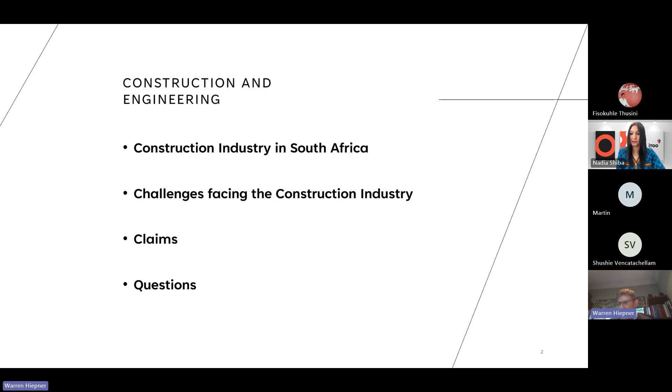Okay. So let's talk quickly about the construction industry and the economics of it. What I want to do here is put it into the South African economy so we can understand its role and who the players are. So in the ordinary course, South Africa's construction industry contributes about 3 to 4% of GDP. The South African GDP in 2024 was about 7.5 trillion rand. That comes out to quite a substantial amount if you think about it, the 3 to 4%. Important is that it's a stable figure. So year on year, it's always in the 3 to 4% of GDP range, which has two issues that arise from it.

The first one is that it shows you that the economy determines how the construction industry does. So the better the economy does, the better the industry does. But it also shows you that the industry is sometimes a leading light or an indicator of where the economy is and whether the economy is doing well or not. The GDP itself has grown about 0.6% from 2023 to 2024. It's anticipated to grow between 1 and 1.5% from 2024 to 2025 and about 1.8% to 2026. So it's supposed to be an upward trajectory, hopefully. A lot has to do with, of course, what's going on in America and tariffs and those sorts of things, but hopefully it's able to fulfill its promise.

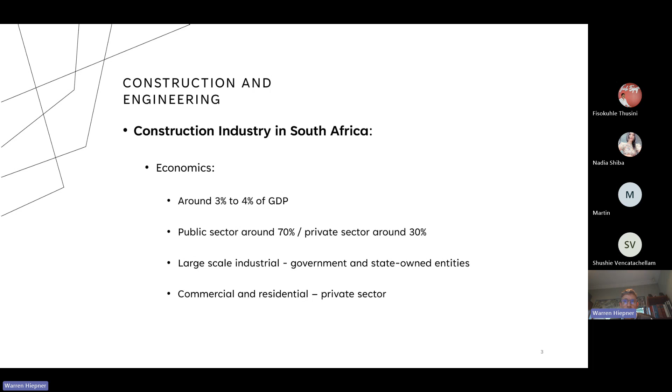There is a trend developing, particularly in renewable energy, where there are partnerships between the public and the private, so-called PPPs, public-private partnerships. And the intention there is to bring the best of both worlds together, with the financial backing and the infrastructural needs of the state combining with what has proven to be the ordinarily better efficiency of the private sector, so that together they can put something together that makes sense and is worthwhile.

Let's look at some of the details of it. So South Africa has about, I think our population is about 65 million, and of those about 15 million are formally employed. About 8% of those formally employed are employed in the construction industry. So you can see the industry punches above its weight as far as its contribution to GDP is concerned. It's only 4% contribution to GDP, but it does have an 8% employment factor. That works out to about 1.2 to 1.3 million South Africans employed in the construction industry.

The division of those demographically, about 70% are in the semi-skilled or unskilled. And of course, South Africa's majority of its employment workforce is in that demographic. So it is a major contributor to ensuring that those who are most looking for jobs are able to get jobs. As far as the professional side is concerned, about 15% of those employed are professionals. The majority of them are, of course, engineers, and the reason for that, obviously, is that there are multiple fields of engineering: civil, structural, mechanical, environmental, electrical, etc.

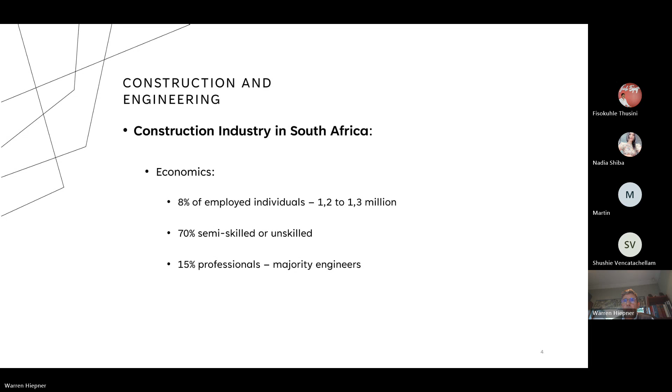Okay, let's go on. Let's look at the role players in a little bit more detail. So as I said, there is the public, the government side, and then there is the private sector. As far as the government or public state side is concerned, there has been a decline from 2018 to 2020 as far as government involvement in the construction industry is concerned. But a turnaround has come about since about 2021, and it's envisaged that that increase is going to continue into the future. Certainly, if you have regard to the promises made and the undertakings given and the indications given at the SONA address, which was given in February this year, I think.

There you would see President Ramaphosa spoke about 940 billion rand being set aside for infrastructure over the next 3 years. That's mostly in relation to roads, bridges, dams, ports, airports, and particularly power. Of that 940 billion, very promising. A little less promising is the reference to about 375 billion of that being allocated for expenditure by state-owned entities. And there we're talking about Eskom, Transnet, SAA Development Bank, SA Independent Development Trust.

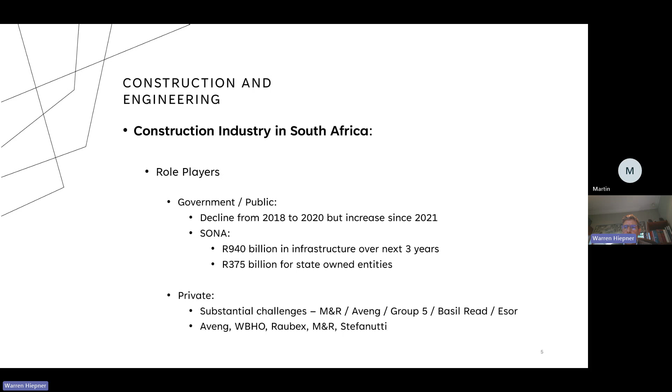And surprisingly, the bigger employers out of those are WBHO and Stefanutti. I think they have about 9,000 employees each of the total. Okay, so now we know who the players are, and you would see it's a substantial operation within the South African economy. And let's just look quickly at some of the challenges that they face and why they are where they are, and why they are not where they ought to be, I suppose, is the issue that we're looking at here.

And of course, the first one is all of our bugbear, load shedding. Introduced in 2008 and has never really gone away since then. There's been fluctuations up and down. There's been promises. There's been government ministers. There's been all kinds of things. Doesn't seem to go away. Those who followed the news this morning would have seen there is talk about them spending billions of rands. I think it's about R1 billion every 10 days on diesel expenditure to keep the lights on. And of course, that's not sustainable on a long-term basis.

So the challenge that arises from load shedding is it affects the time to complete projects. There's delays, not only in relation to the projects themselves, but also the projects in the pipeline, and there's a knock-on effect on those pipeline projects. The cost implication, well, time is money, so any delay, somebody's got to pay for that. And there are then efforts by the entities involved to protect themselves and take mitigational steps to avoid the consequences of the load shedding, which in itself is a cost implication for the project, and somebody has to bear that cost as well.

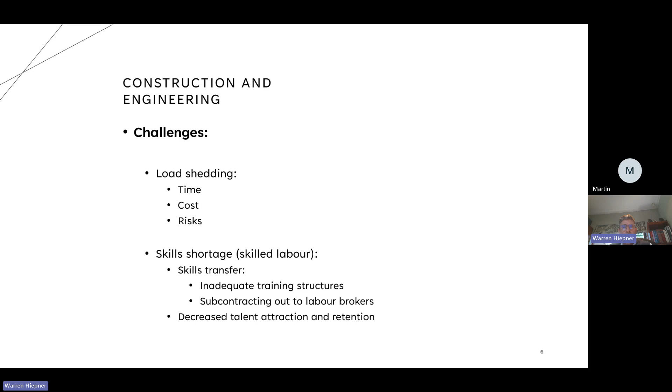The consequence of that is now we have quite a lot of foreign nationals being employed to fill the gap. And Martin perhaps will talk about one of the issues that arises from that, but certainly in the George collapse, there was a substantial number of foreign nationals employed, and a number of those foreign nationals were unfortunately killed in that collapse. And I don't think all of them have been identified to date because of that issue. So it comes with its own challenges and difficulties filling that gap with foreign nationals.

Of course, no presentation on challenges would be proper without a reference to corruption. South Africa is ranked, I think, 82nd on the Corruption Perceptions Index. I think they've got about 180 countries that they monitor. We're 82nd, and surprisingly, since 2021, we're dropping. And when I say dropping, meaning we're worse off. We are looking more and more corrupt. Corruption is prevalent in South Africa at all stages of the process.

One need just look at the 2010 FIFA World Cup bids and construction bids as evidence of these things going on. And it ranges from tender rigging, fronting, kickbacks, undisclosed conflicts of interest. Most recently, I think more than 10% of Eskom's staff was shown to have conflicts of interest that were undisclosed. Yesterday, I think there was news in relation to the Independent Development Trust of some 33 million rand being paid to family members from the trust that was destined for better intents. So it's a pervasive problem, and it's something that the country really needs to get hold of.

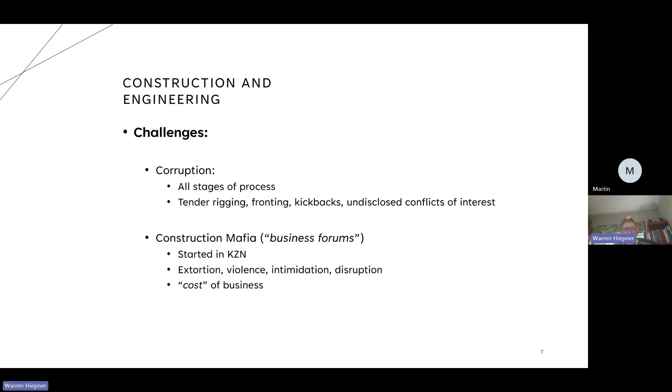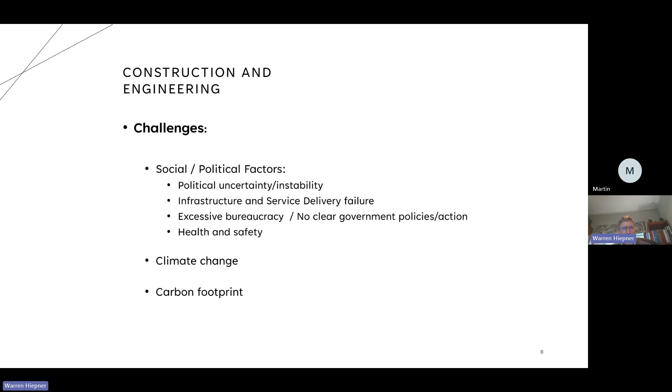Another consequence of that is the issue of repair methodology, and Martin may talk about Kusile, where the repair methodology of one of the failings there had air pollution implications, and the steps that had to be taken to get that through became a little bit more complex than what it otherwise would have been.

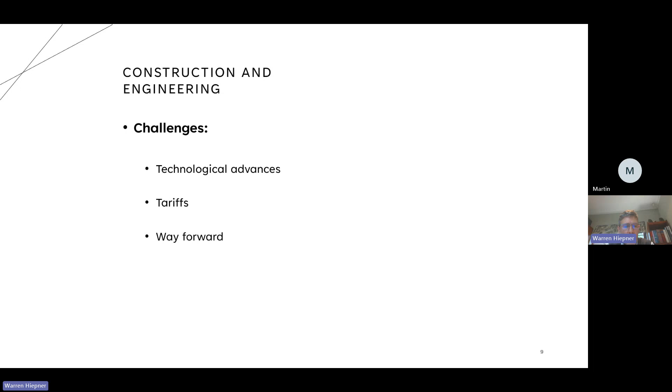So that's basically the background to what I wanted to give, and I'll perhaps hand over to you now, Shushi. Thanks, Warren.

Thank you for that. Just one question on retention. With all these challenges, it's possible in the next few years that we could have an exodus of engineers leaving our shores to other countries. Wouldn't that also become a problem for us as well?

Yeah. Or are you actually seeing it? Are you seeing it now that there is emigration?

No, I think we do see it, and what we see is the mature engineers, the ones we call the greybeards, were kind of put out to pasture to make place. Then what you had is the young up and coming engineers, and they have the ability to move, they have mobility, so they're in demand. So instead of them coming to fill the gap, they're looking elsewhere, particularly when South African prospects are not great. The result is you then have the newbies who are now having to shoulder all the responsibilities, sometimes way beyond their capacity and experience, beyond what they should be expected to be doing. So it comes with risk, there's no doubt about it. There is certainly something to be said for having grey-bearded people, and I don't say that because I'm grey-bearded, but there is value in having them around, just to give you some sense of reality and keep everything solidly on the ground. I think it's a problem for us.

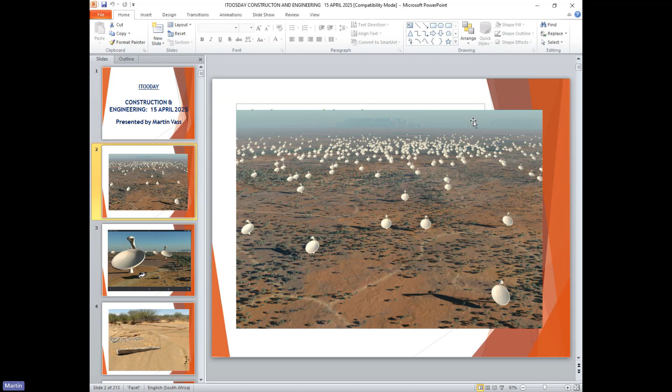Involved in this is about 450 kilometers of road. You see some of those in front of you. These roads are used for servicing these dishes, and also used by the heavy vehicles and cranes in erecting these large dishes.

At the time of the event, which was a couple of weeks ago - one reason they chose the Karoo is because you don't get much rain there. And of course, with the changes we're having with the environment and climate, we had severe storms up there, very, very severe storms, and what it's done is really taken away these roads.

Of the 450 kilometers of road on the site, about half were existing roads from the farms, and the other half were erected as part of the project.

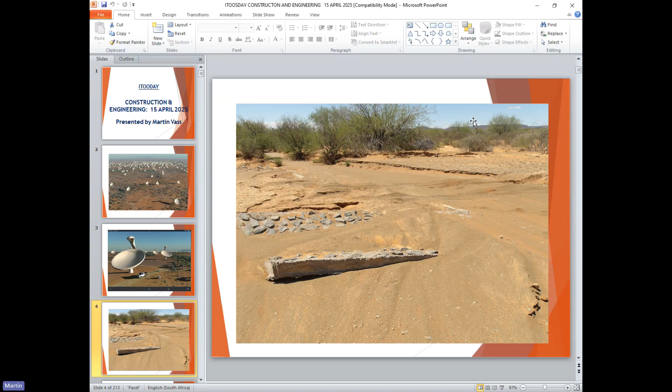Now, those roads have been absolutely devastated, as you see here. What you see in front of you is what we call a drift, a concrete drift, that allows you to drive through a small stream, and those have been completely destroyed.

I'll go to the next one, and you see here it's taken out the whole of the drains, the side drains have disappeared. Most of the gravel on the surface has been washed away. So really they've got to go back now, and we're in heavy discussions with the contractors and the owners of this square kilometre array about what we're going to do with these roads now.

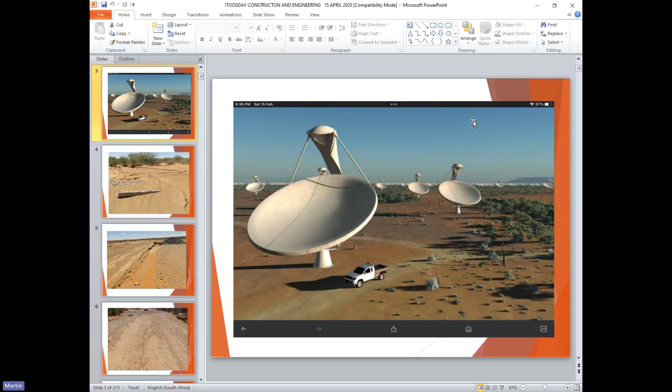So climate change is very, very much involved here. One of the reasons this site was chosen was because of the dryness, and now that kind of myth has disappeared. We're not sure now how they're going to rebuild these roads and to what kind of standard.

It'll increase the project cost considerably if we're going to put in what we call a normal road, which is a layered road with premix, or are we just going to go back and put in a standard gravel road, which you see in front of you here.

So when the engineers do a design, we have what we call a 1 in, so you have a 1 in 20 or 1 in 30. What that means is you look at the statistics and data for the last 30 years, and you say in the last 30 years you experienced a flood of that proportion every 30 years. And if you're designing 1 in 50, same thing - you look at the data for 50 years and design for the worst case scenario within that period.

Of course, what we're getting now is a return every 2 or 3 years of a so-called 1 in 30 or 1 in 40 or 1 in 50 event. But that will only feed through into design over a couple of years, because you've got to build up the data. So going forward, designs will have to change to allow for the change in climate conditions, but they're not being changed at this stage. We're still designing for a 1 in 30 or 1 in 40 design, but unfortunately we're getting those every couple of years, as you see here.

So the engineers have got to really think again about how we're going to design even temporary or permanent roads, and what data do we now use. Do we say we're in fact getting a 1 in 30 every 3 years? Because that changes not only the design, but the way it's priced and specified. So it's a major concern, climate change, and I'll show you the next couple of slides on other projects where we're experiencing this problem.

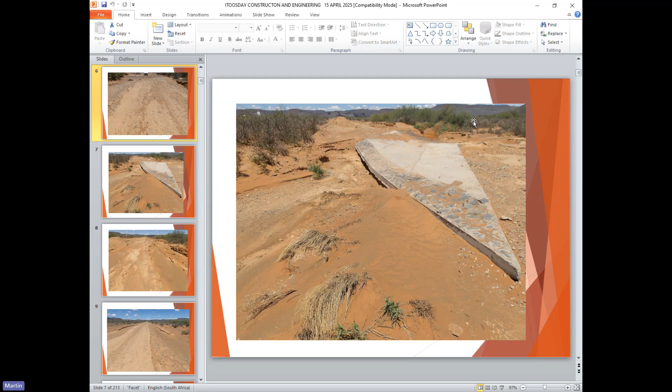It's also a problem with insurers. They insured a gravel road here, but didn't insure for the ground around the gravel road, which is now being lost. So the insurers may well say we'll pay you for the damage to the road, we'll pay for that, but we're not paying you to put back material that's been washed away, which was never part of the works. We have presented this to insurers and we're waiting for answers on that very question.

So this is a very large cost implication to the client, because the client has to now go back and put back existing ground before the road itself can be reconstructed. So it has a very great knock-on effect, not only on the cost of doing the job, but on the client itself, which we're experiencing in this particular instance.

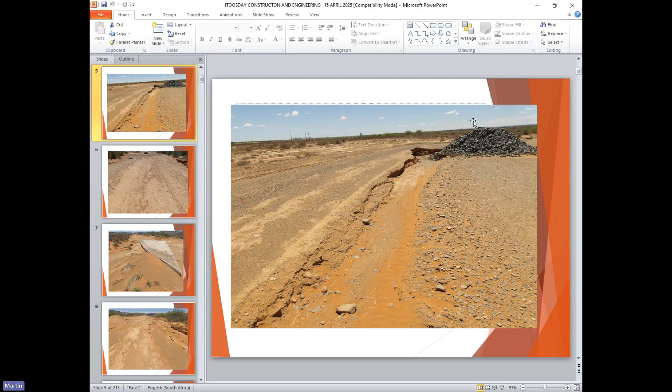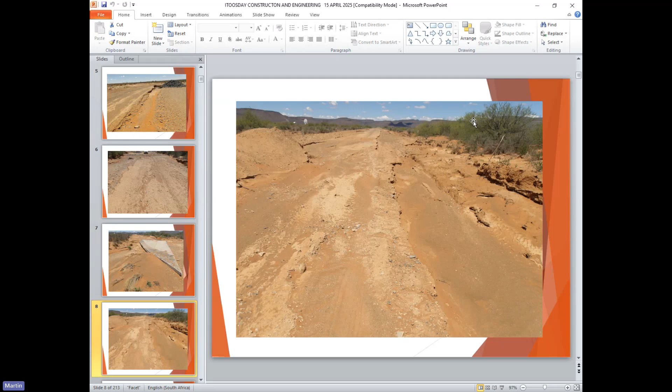Here you see the road has virtually disappeared. There is no road left. So here we've got to go back, got to re-establish that existing ground, and then rebuild the road from scratch. The road's gone.

Here, we've got a little strip of gravel in the middle. The sides, what were side drains at the time, to carry normal water, those side drains have disappeared, and all the ground around those roads has also been washed away. So we've got to come back in. We've really got to rebuild the existing ground.

And that was never the intention. And the insurers are going to say, well, we'll pay again for the damage to the road itself. We're not paying for putting back that virgin ground that was being lost. But again, we're waiting for that answer on that one.

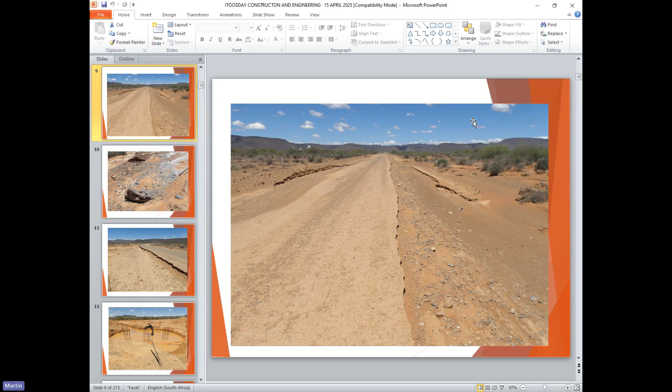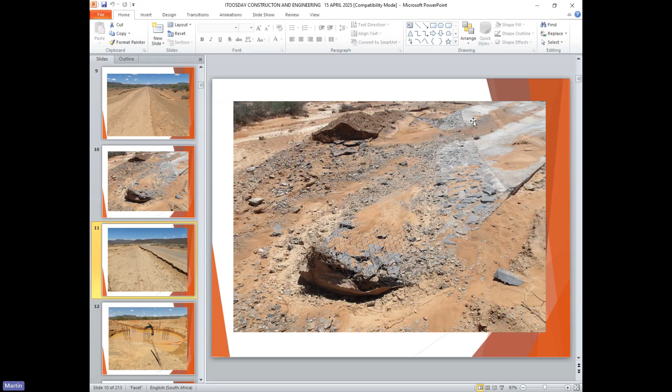This is another drift. As you see, it's completely washed away. The whole thing had to be demolished and start from scratch to rebuild the road and rebuild the drift. Very bad here. This is, in fact, one of the worst areas here. The road is now sitting elevated above the existing ground.

It's almost a point. Do you take the road away and drop it back now down to the new ground level, or do you build the ground level back up to that road? Again, there's a problem. If you rebuild the ground, even though you compact it, it's compacted fill. So when you have another heavy storm, you'll go back to where you are here. It'll just wash it away again. So there's a lot of consideration here the engineers have to make of how to rebuild these roads. And there'll be a lot of discussion on this point.

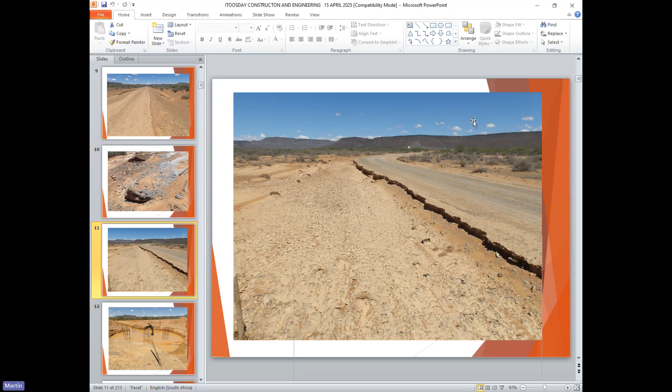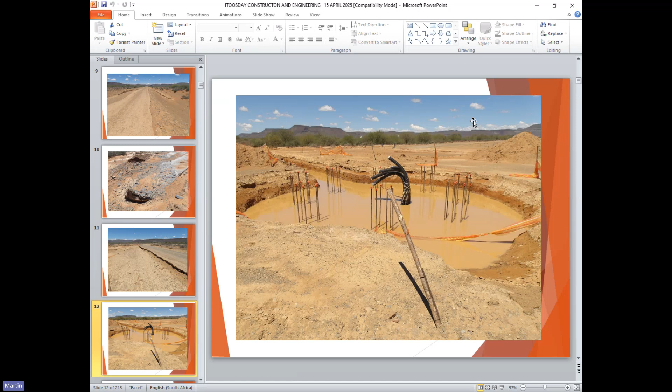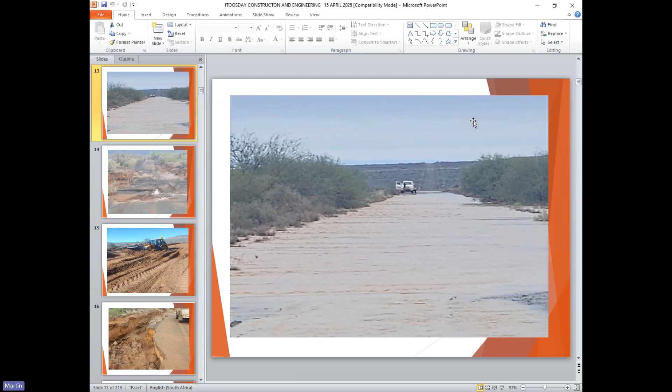The road here completely flooded. It's a very flat area, even though you can see a hill in the far distance. It's a very flat area. So when it rains heavily, there's huge ponding that takes place on these roads. And there can be days or even weeks before the contractor can get back onto the site.

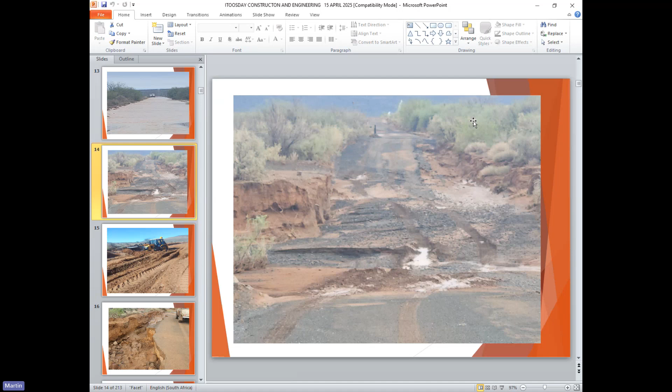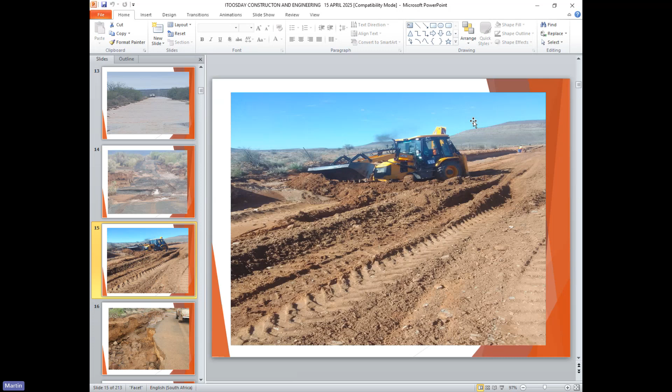They've started the reconstruction work here, and here they're putting the ground back that's been washed away before they start rebuilding the road. So they're bringing material in from borrow pits, and they'll slowly rebuild that ground area, and then they'll start really reconstructing the road. What they've done here is they've taken the road itself away as well, and they're rebuilding the whole area again. So they're not going to try to build each side of the road. They've taken that road away, and they're going to just rebuild it from scratch and just drop the level of the road.

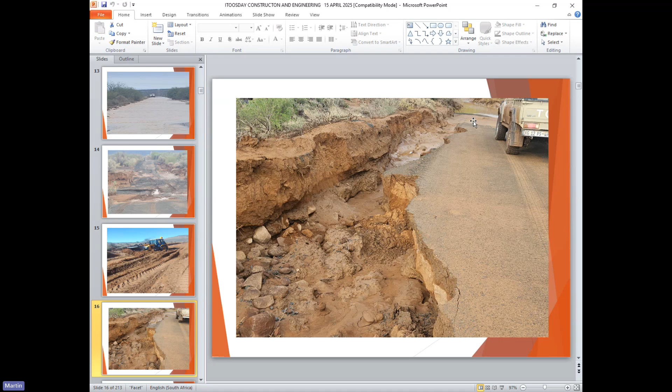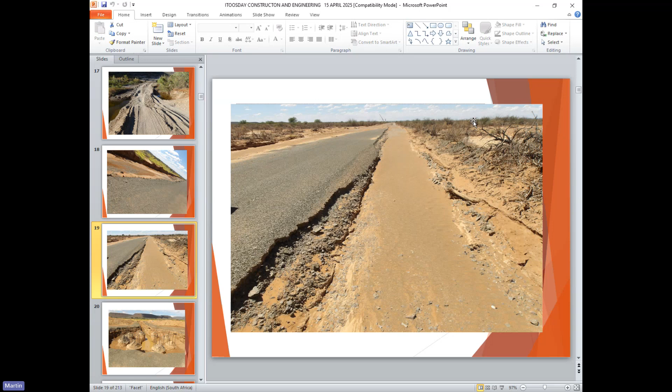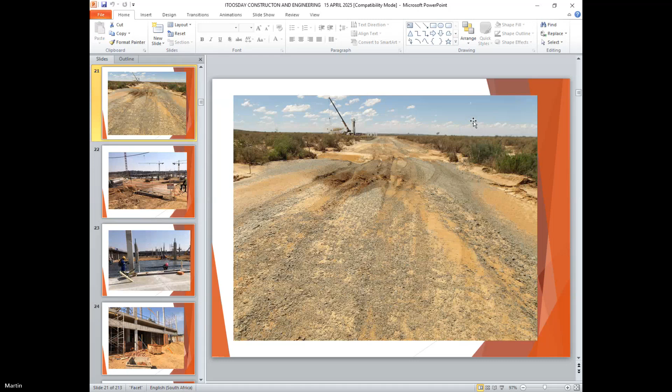Right. Next one I'm going to look at now is a design matter. This is a place called Soshanguve Mall. This is a new mall going up in that area. In fact, it's a very large mall indeed. There is an existing mall, and this has been built right next door to the existing mall.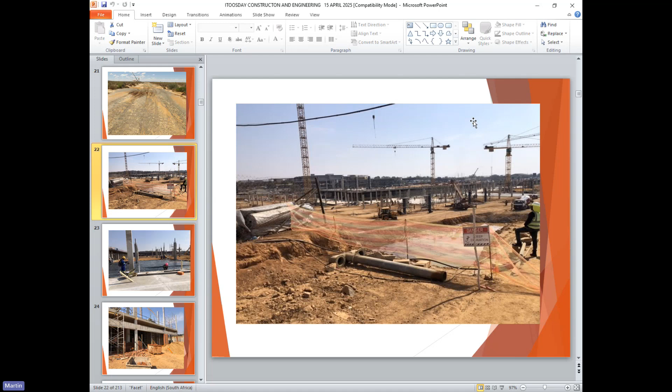And what these are, conventional concrete columns, concrete slabs. And you see here, this is standard. Before you put the concrete slab down, you put a plastic membrane down there to stop damp coming up to the floor, and then you cast your concrete. You see your columns, very conventional, and on the left side, you see the slabs going into place.

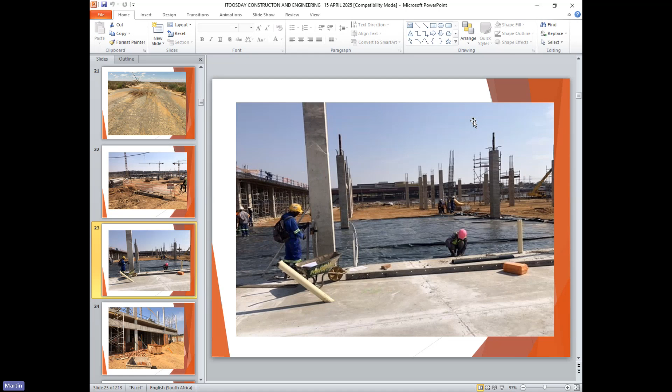So the slabs here, there's a beam there, the bottom section is a beam. The one I'm concentrating on is the slab above. These are what they call post-tension slabs. You have two different types of slab.

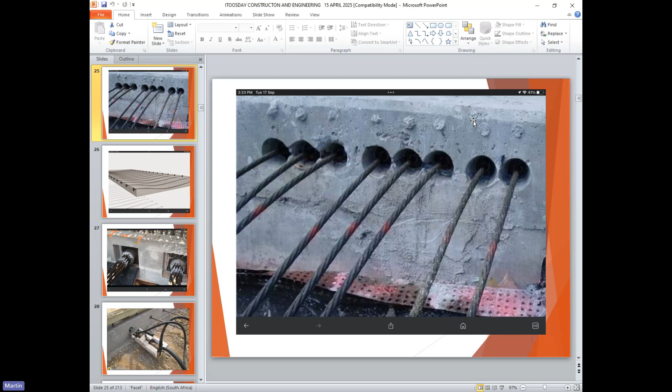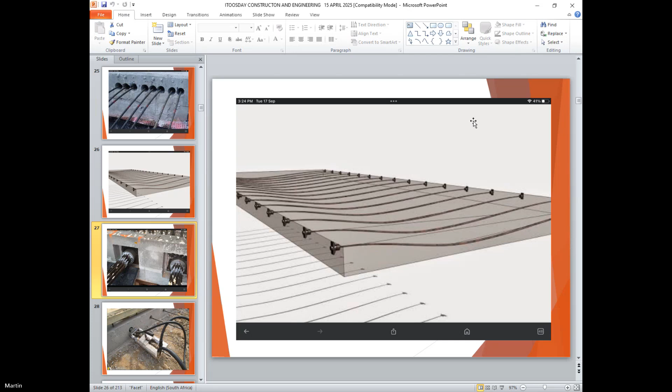So I may go back a couple of times just to explain again. So that is really a profile of what the tubes look like. They are deformed slightly, so that when you pull those cables tight, you're tending to lift. That cable is trying to go straight, and you're tending to lift the slab, as you see there. As you pull it, the slab is lifted. And those are kind of jacks you put on the end of those cables to pull them tight.

So what's been happening here is that when they pull those cables, as you see, there's some white marks on those cables. They measure very carefully as you pull those cables, as you stretch those cables. So you measure the extension on the cable, how much the cable is extended. And you work out, if you're putting 70 tons, for instance, on that cable, how long the cable will be stressed or pulled. So you use that correlation between how much the cable is pulled and how much the load is on the jack. And if those two tie up, then you've really satisfied that you've achieved the required stress on those cables.

What was happening here is they were getting the full load, the 70 tons, but they weren't getting what you call the extension on the cables. So they went back and forth. They sent the cables to the local university for checking. They then sent them to Germany to check. The cables seemed absolutely fine. There was nothing wrong with the cables, but they couldn't get over this problem. They did a couple of those slabs. They pulled them, but they couldn't take the props away because they were not achieving the extension on the cables.

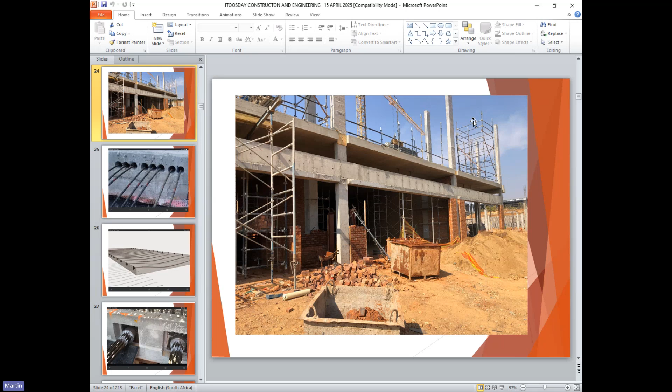So eventually, after we did a lot of investigation, it was found that the calculations were incorrect. And in fact, these calculations had been used for a long time on other projects, and they were wrong. So the design of the original extension on the cable was wrong. In the meantime, they put more cables in to overcome the problem. What they thought was a problem was never a problem. It was just that the extension given, the figure given, was wrong. So they put a lot more cables. It's like 3 million rands more cable. No need to have done that.

And then the design was revised, and everything was hunky-dory, and they went ahead with the remainder of this Soshanguve Mall. But what we then had to do was look at the other projects they'd done prior to this, where the same calculations had been used, to ensure that there were no other problems on the other malls and the other buildings, and they all checked out, thank goodness. But here was a typical example that someone had made a mistake in a calculation some years back, and it had been accepted, and no one went back and said, we need to check this now and again. No one checked that design, and this was the first real failure that forced them to go back and look at the original design calculations. So it's a problem the engineers have got to keep up with, that you really must double check your design, and I'll get to that on a couple of other failures we've had on the next couple of slides.

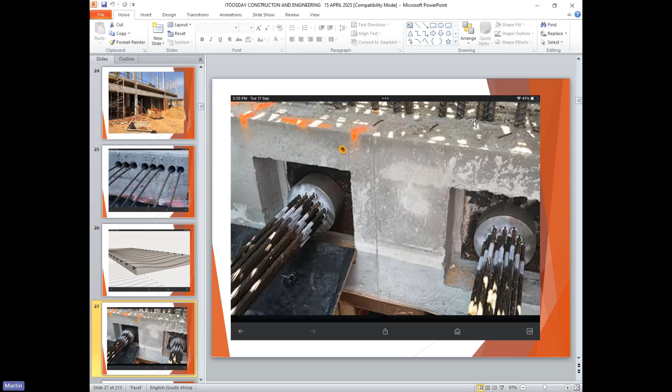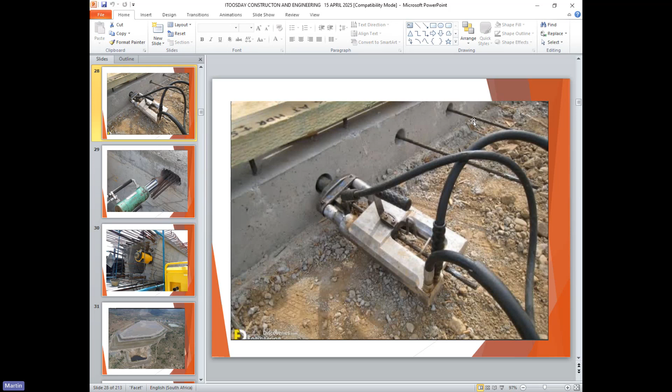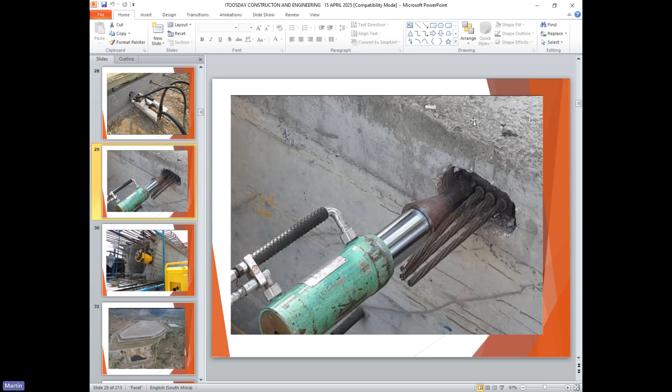That's a typical hydraulic jack. So you put the hydraulic jack on the cable and you pull the cable. The tubes you see are hydraulic oil, and that slowly pulls the cable. The other end of the cable is anchored, it's tight. You just pull one end, and then once it's pulled and it's tight, you then epoxy it. There's another jack. That jack is partially extended, as you see. So it's pulled one. There's 3 more cables to pull. Once you've pulled it out, it's locked in position. Once all 4 cables are pulled, you then grout it up.

This is a very large jack on a beam for a bridge. You see the other cables next door to it. Some have been pulled. The one immediately above has been pulled. There's a lock-off plate you see has been in position. What will happen now, they'll come back. They'll cut those extensions, those cables sticking out will be cut off. The cables then will be grouted up, and that whole of that beam will then be lifted in position onto the bridge. So that's a typical post-tension system.

A pre-tension system is when you go out and buy, let's say, a lintel for your house over a doorway. That lintel is pre-stressed. So they pull the cable and they then cast concrete around the cable. Once the concrete is set, hardened, they then can release and cut the cable, and that stress then goes into the concrete. So that is pre-stressed. This is post-tensioned. So most of the large projects on site like this are post-tensioned. The little lintels, etc., are pre-stressed.

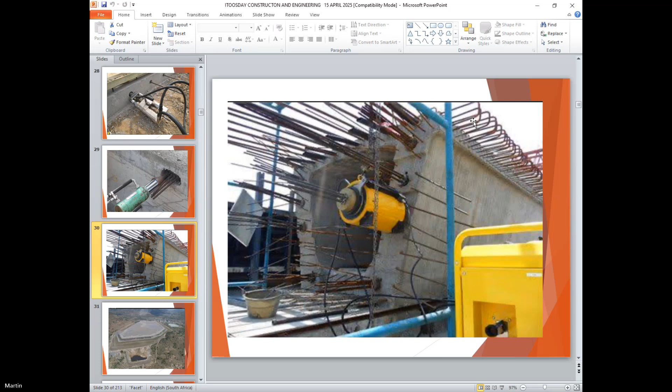At the moment we're getting about 2 of these failures a year around the world. We just had one recently in Zambia. We had one a couple of years ago in South Africa. In many cases it kills a lot of people. Fortunately, the latest one in South Africa didn't kill anyone. And I don't know the one in Zambia. I don't think it's killed anyone. But that's fortunate. But in many cases, it not only causes death, but it causes a huge amount of pollution. But that's a tailings dam.

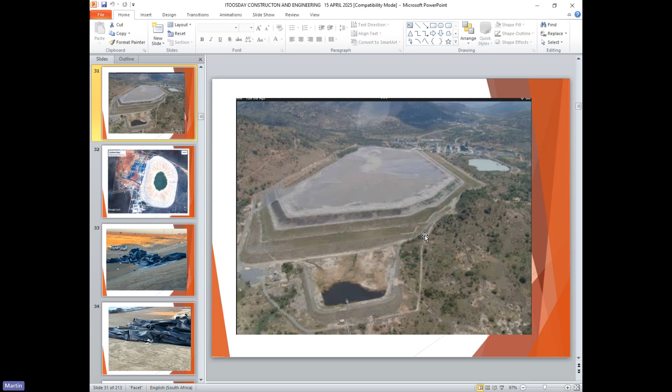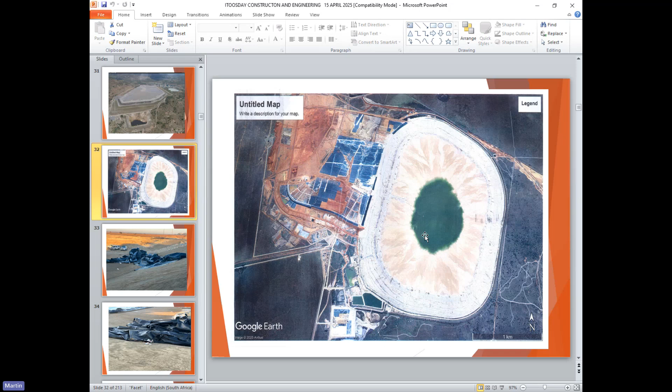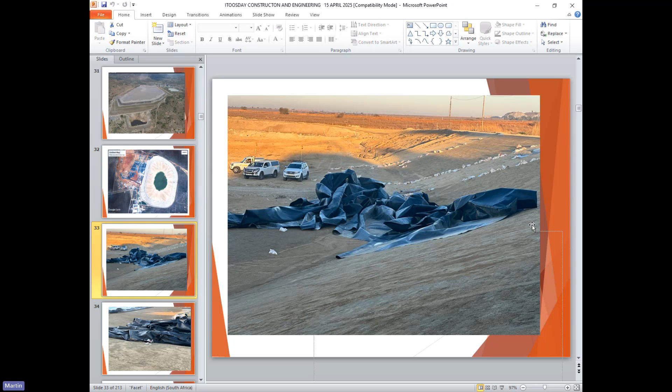Excuse me. There's a typical example. That ground you see underneath is a clay layer, again, as I explained, to stop penetration of water into the groundwater. Again, that surface now had to be cleaned off, had to be checked before the new plastic liner is put into place.

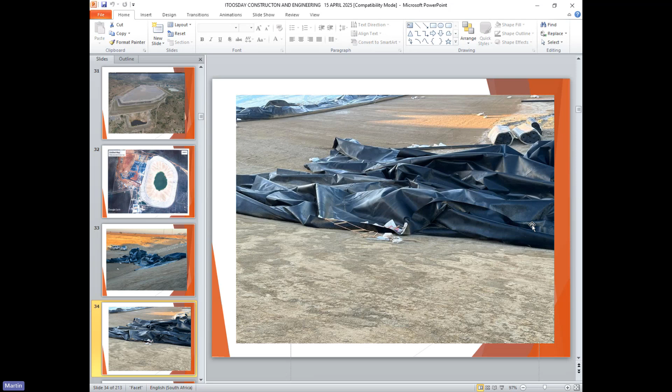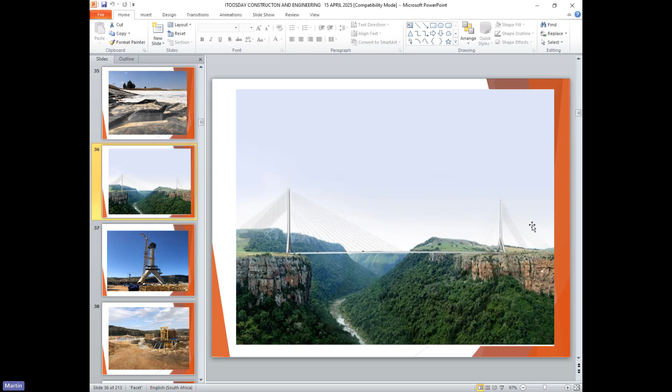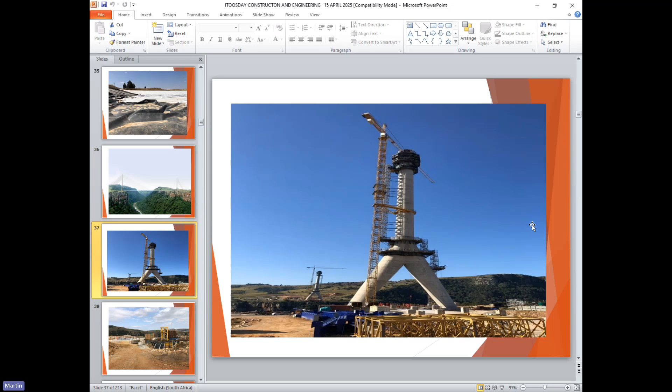When they were pouring the big concrete bases for these two pylons, in fact the one on the left there, the concrete came out. You see, this is one of the pylons here. I was down there about 3 weeks ago. That pylon now is almost complete, ready to start putting the cables through. When they were pouring the large base under this pylon, the concrete came out with holes in it. It came out very badly honeycombed, and the concrete had to be removed.

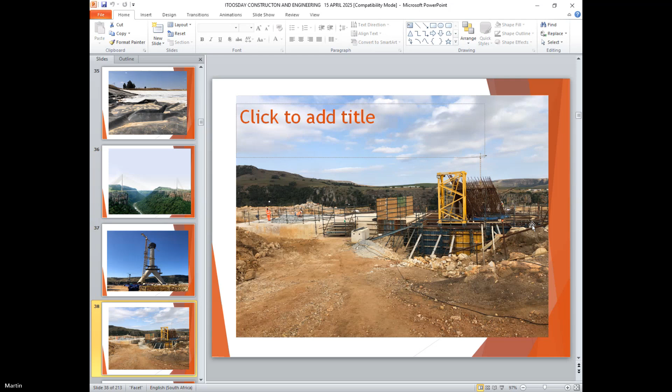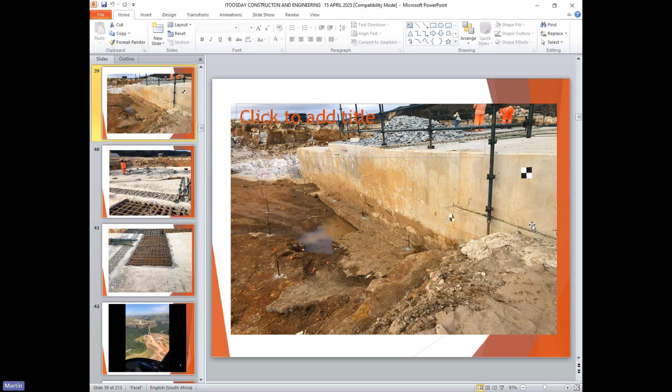Here's the concrete you see here. I know if you're not a concrete fundi, it may not make much sense, but that concrete is highly honeycombed, and in fact has been rejected. So what we had to do was to break that concrete out. About 450 cubic meters of concrete. It cost about 20 odd million to break that concrete out.

But we had to break it out without causing any damage to the existing reinforcing steel, which you see in front of you there. So we removed that concrete using high pressure water, so the steel itself was not affected.

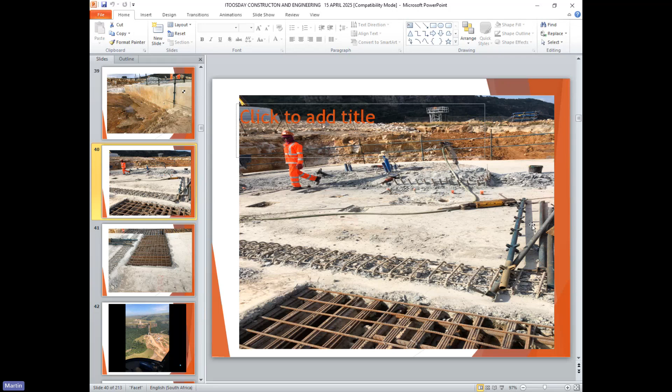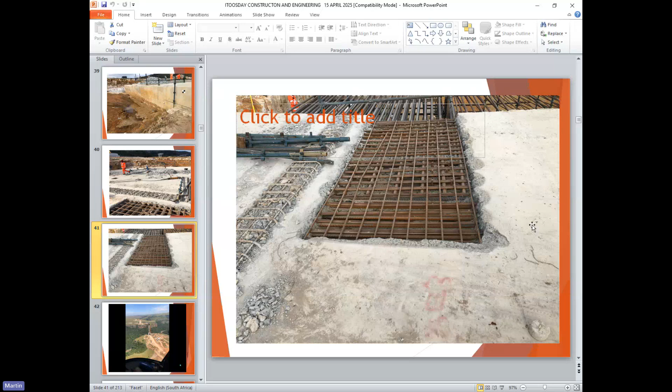Sorry, Martin, just in the interest of time. Sorry, how long have I got? We've gone beyond time. Oh my goodness, I've only started. Okay. Sorry guys, I'll show you one more shot. Sorry, just going down.

We were down there 2 weeks ago, and as you see, the site itself, they're building the road. The road has been flooded, and a lot of the sides of the excavations are collapsing, which you see on the right-hand side there. And it's a problem. Transkei is obviously subject to a lot of water. That area is causing real havoc with the roadworks down there.

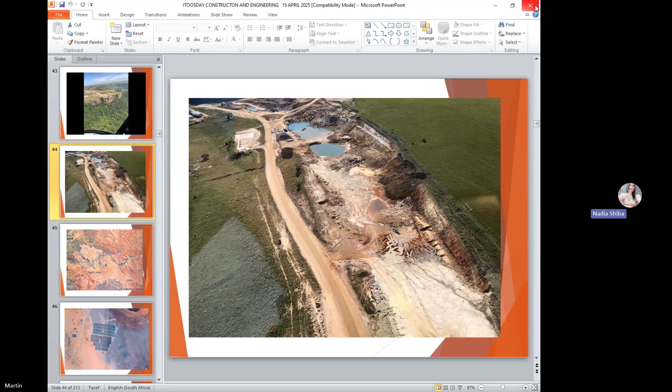Okay, Shiba, I'll stop. Thank you for that. From what I can see, we don't have to worry only about external challenges, but also internal challenges. For example, not checking a design for many years. And I would think that you have to, because parameters change, climate changes, scope changes, etc. Absolutely. So very, very insightful.